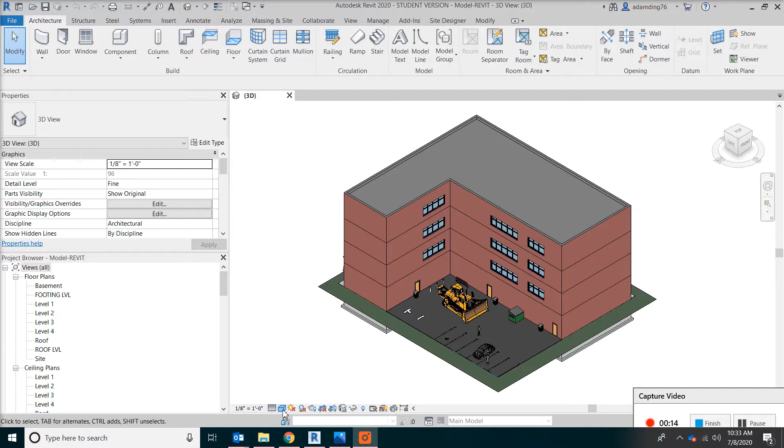Today we are going to look at the structural steel, a critical substrate for commercial buildings. In 3D view, go to the lower left corner of the screen. Beside the scale, click on the second button, which says Visual Style. Click on Wireframe. Now we'll be able to see how the building supports itself.

Our exterior wall is not load-bearing. This structure is a classical example of a standalone steel-framed building. How it works is the steel columns will go first. Beams and girders are supported by the columns. After that, the steel joists will be supported by the girders.

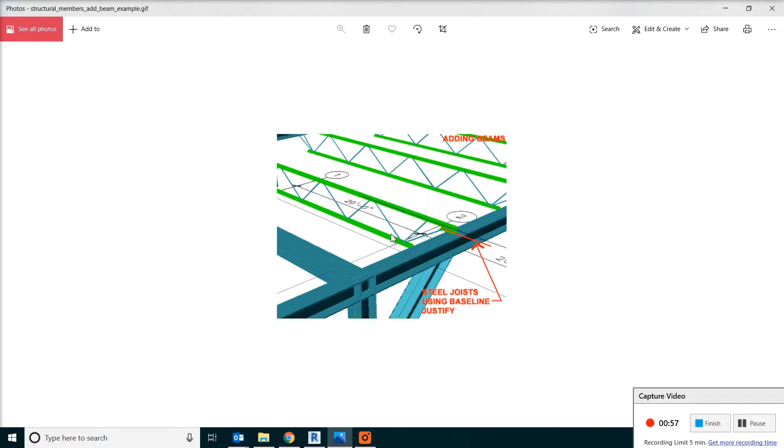Go to section 1. We should be able to identify the columns, the beams, and the joists. We also notice on every floor, including the ground floor, they have 1.5 inch metal deck. That goes from the ground floor, first, second, third and fourth.

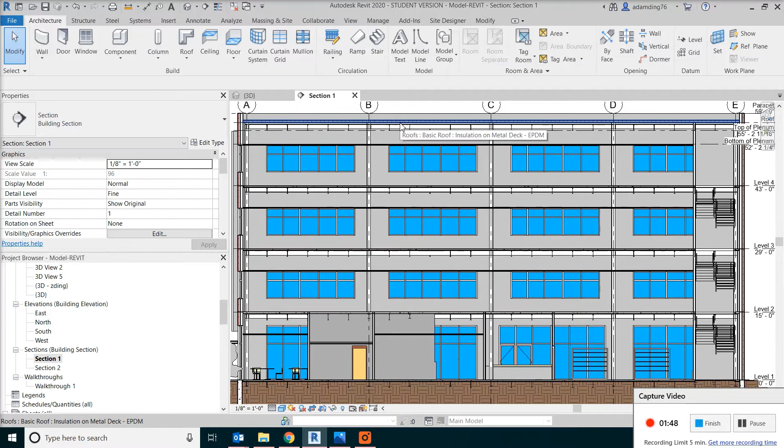But don't forget, we have a roof structure. Pick the roof. Click on Edit Type, click on Edit Structure. The roof deck is a 1/4 inch, which is different from the one that's being used for the floor.

Let's pick a column above level 2 on grid line C. This is a W10 by 49. The W means it's a wide flange shape. 10 means 10 inches. 49 means linear weight, 49 pounds per linear foot of the column length.

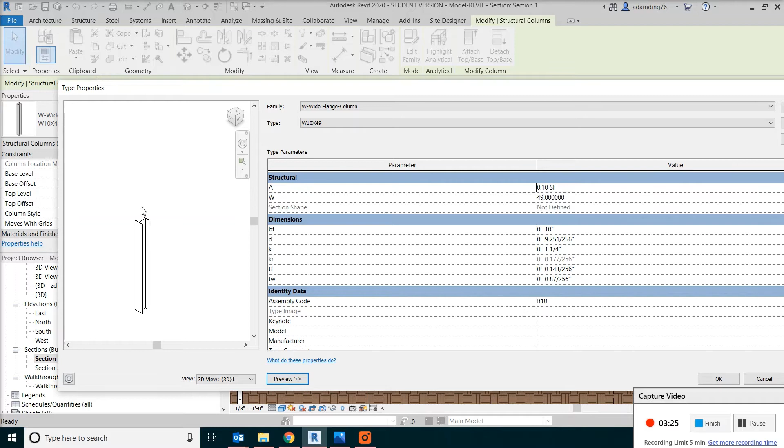You can also see more about the column by clicking Edit Type, 49 as the linear weight. Click on the preview. You can see what the column actually looks like. One thing that we need to notice is the column currently has a -5 inch offset for the base.

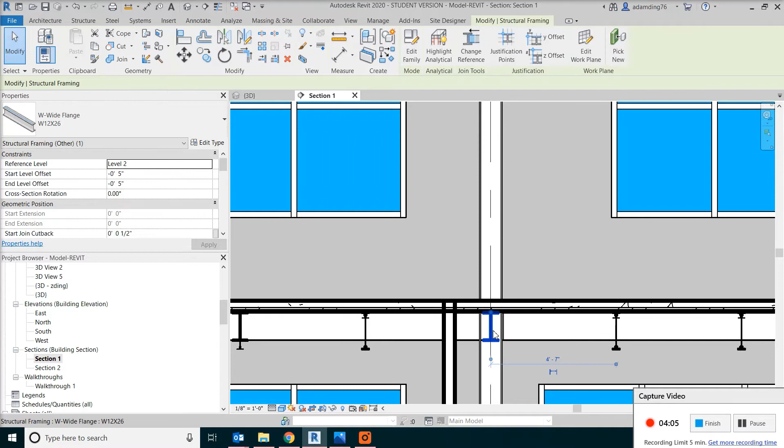This means the column does not stop at the floor level. Actually, it goes lower for 5 inches. Some of us probably will say that the column was trying to reach the beam underneath. If you click the beam, the beam actually also has a 5 inch offset as well.

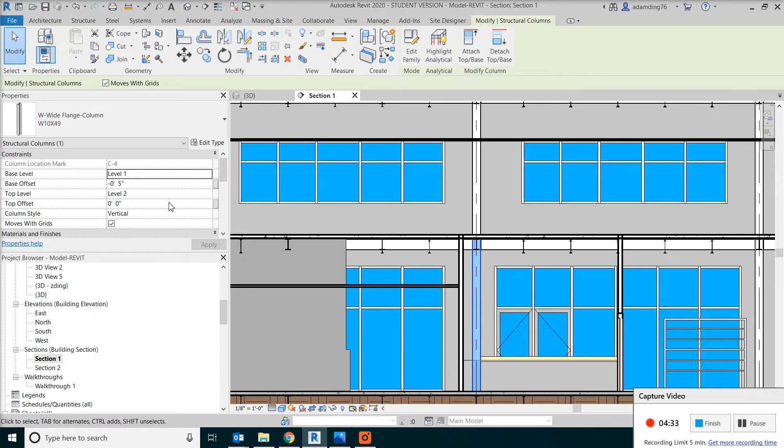However, if you look at the columns and beams together from floor to floor, you will notice this is actually a design conflict. The column on level 1, the top, doesn't have any offset at all. Revit actually has a tool for this. It's called clash detection. With the column selected, go to Collaborate tab, click on Interference Check, run Interference Check.

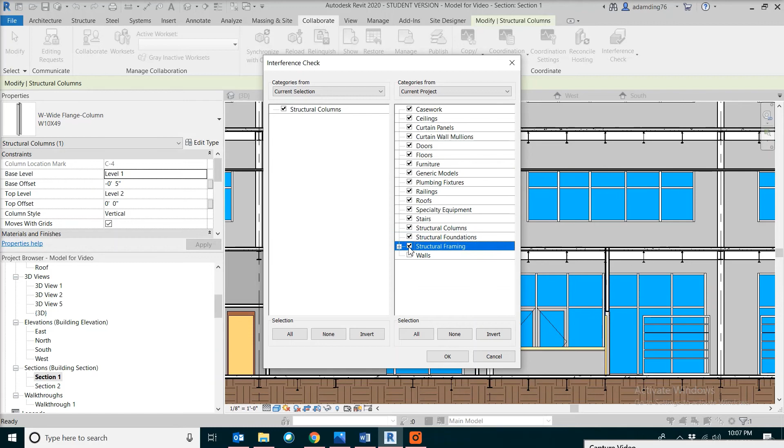On the left side, this is the column you selected. On the right side, you can switch to Current Project. You can pretty much check everything that you have to see if the column has any conflict with everything else in the project. But most likely, like we said, it will be some structural elements.

Now we're getting a report about all the interference. For example, the one we looked at was 2 columns from the first floor and also on the second floor. They do have some conflict because of the offset.